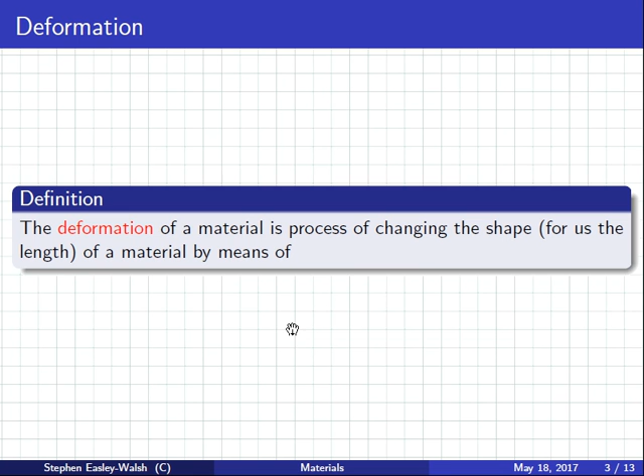Okay. So I actually mentioned this word in the last class, but exactly what do I mean? So when we say the deformation of a material, what we mean exactly is the process of changing the shape, or for us, which is the length of the material, by applying a force, which we call a stressing force. So deformation means changing the shape by using a force. That's all deformation is. So if I deform something, it means I change its shape by applying a force.

So if I deform someone's face, it means I change the shape of their face by applying a force to their face. Yeah? The reason I use that example, Andrew, is because in English you have these things called collocations. You know collocations? Yes. And deform is one that usually goes with face. So if somebody's face has changed shape, you don't say they have a strangely shaped face. You say they have a deformed face. You knew this one, Monica, did you? Yeah. Okay, you have that definition?

Is that your breakfast, Chew? Yes. Healthy breakfast, energy drink and chocolate biscuits. We said he's either in bed or dead. It's one or the other. And if he turns out to be dead, we know who it was. He's already admitted to it. Okay, continue? No. Okay.

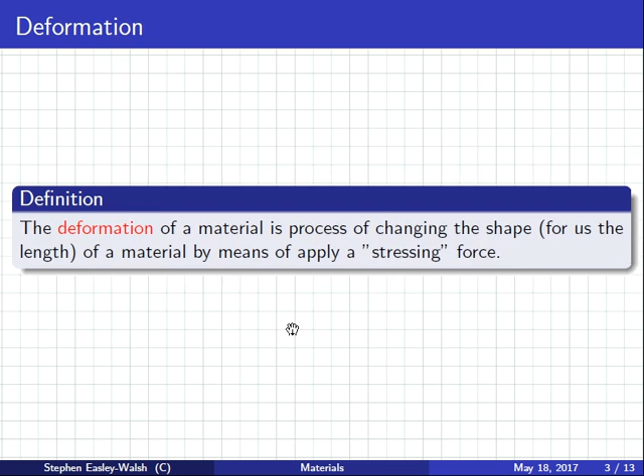Continue? Yeah. Okay, continuing. Next. The word stress actually has a precise physics meaning. When we talk about the stress on a material, well, actually I wonder if anybody knows this already from any physics they might have done. Energy. No, it's not actually an energy term. It's nearly that. It is related to force, but you're not quite right. It's not quite equal to force.

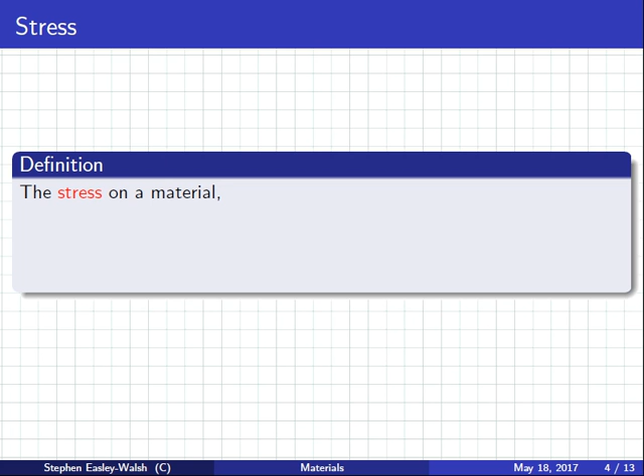The stress on a material is the force per unit area. In other words, it's the force over the area. And importantly, when I say cross-sectional area, what I mean is, if this is my material and I pull it, it's the force divided by this area here. That's called the cross-sectional area. So, what's the unit of stress? Pascal. So it's like a pressure rather than a force. Okay, so this is a new term for people. Mathematically, this formula: stress is force over area.

Be strong, Jerry. Be strong. I try to be strong. The heaters are on, aren't they? The heaters are on. I know. You need to get used to this. It's only going to get colder. This is your life now. Adapt. But I heard that it's not really like this weather all over the place. Correct. It's going to get colder. I'm sorry, it's going to be like this until March. It's 2. Yeah, and it goes minus. I hope so. Why? Because it is my imagination. Well, you won't have that problem here. And we want snow. You won't get snow because we're too near to the ocean. You'll have to move west for snow. So you'll be cold and no snow, and it'll be dark, and you'll be preparing for a test, and you'll be hungry and cold. It's so dumb. I want to go back. No, be strong. This will toughen you up.

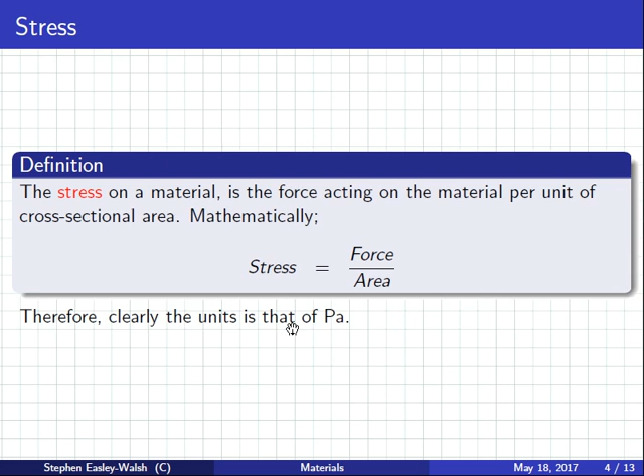Okay. Therefore, the units are clearly pascals, so it's like a pressure term. Now, strain is our second term. Strain has a definition as well. Does anybody know strain? Jockey. Joint. Go on, Sean. You might know it actually. I know, it looked like you knew it. Yeah. Absolutely. Just looked like, okay.

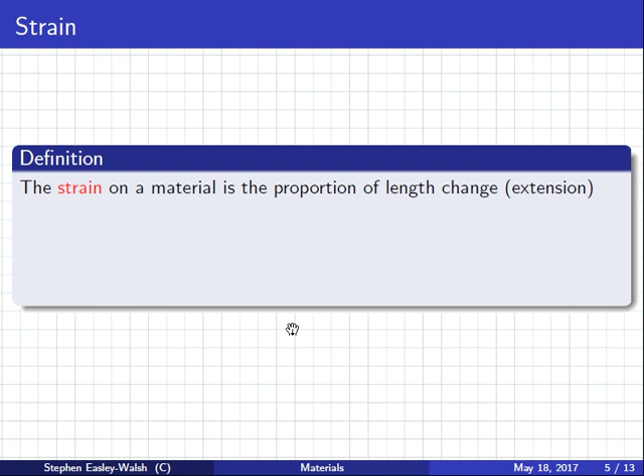The strain on the material is the change in the length, which is the extension, over the original length. Basically, the strain is X over L. It's how much you extended divided by the natural length. So a strain of 0.1 means a 10% increase in the length. A strain of 0.2 means a 20% increase in the length. Yeah? What's the unit for strain? No unit. No unit for strain. Yeah?

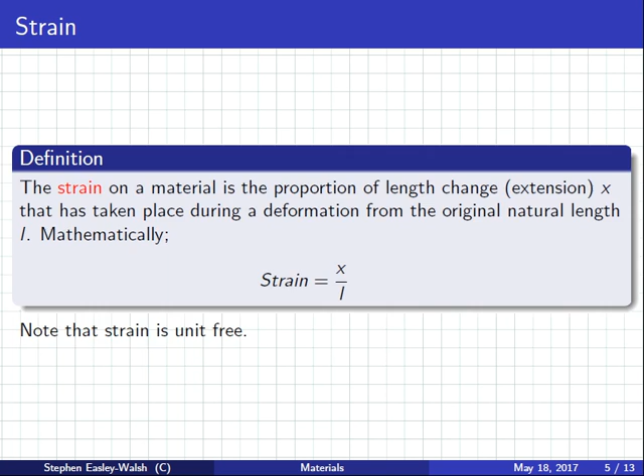Ready? Yes? Okay. So now that we have stress and strain, we have this new constant called Young's modulus. I wrote the letter Y, but really I should have used the letter E. I don't like using the letter E, but that's what they used in the book, so maybe I should change this to the letter E. I just don't like using E because I'm using that for energy already, but that's what they use in the book, so I think I should change that. Anyways, Y or E, whatever you use. Young's modulus, no, I'll change it. E. I'll change it later.

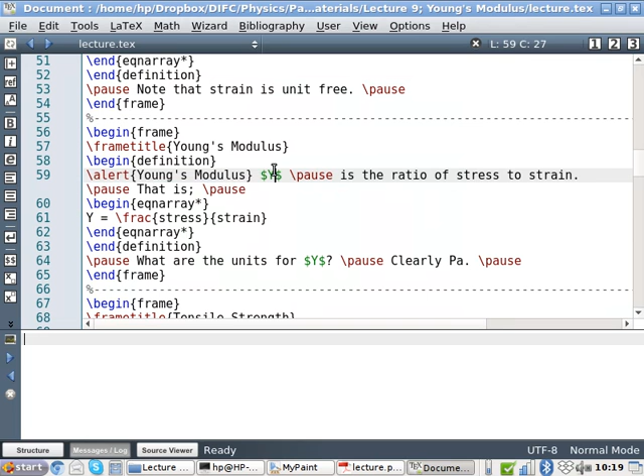It's the ratio of stress to strain. In other words, it's stress over strain. Okay. What's the units for Young's modulus? Well, what was the units for stress? Newton. Pascals. And what was the units for strain? No units. So what's the units for Young's modulus? Pascals. Clearly Pascals. Clearly.

Yeah. So, stress was force over area. So is stress constant? No, because you can change the force. Okay, the area you don't change, but you can change the force. Strain is extension over length. Is this a constant? No, because you can change the extension. The length is constant, but you can change the extension. But what Young noticed was that if you take the stress and divide it by the strain, that is a constant, and that is a different value for each material.

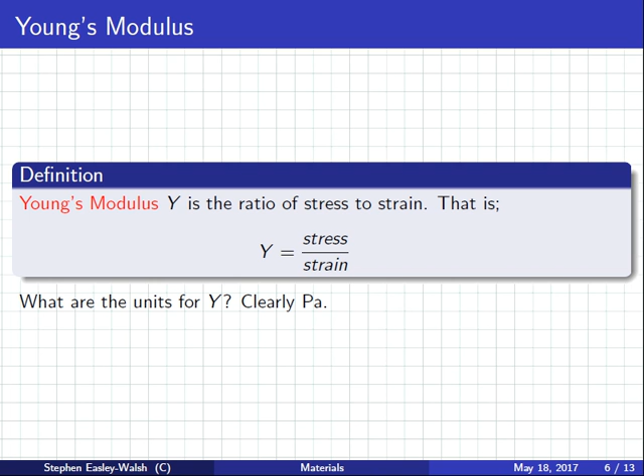Now, we'll come back to exactly the use and importance of this in a moment, but we'll need some more terms. Next term is something called tensile strength. Does anybody know what tensile strength is?

Go on, Sean. You can do it. Come on, Sean. We believe in you. Somebody. It's to describe a material. Maybe it's a... Come on, Sean, tell me! I'm dying here! Try again and feel better. I don't know how to. No, just try, Sean, just try. Don't worry about your English, just try. Okay. Describe a material. How can it... in the lab? Yes? Finished or more? Okay, I'm not sure if I understand, but let me tell you what it is, and you tell me if you understand.

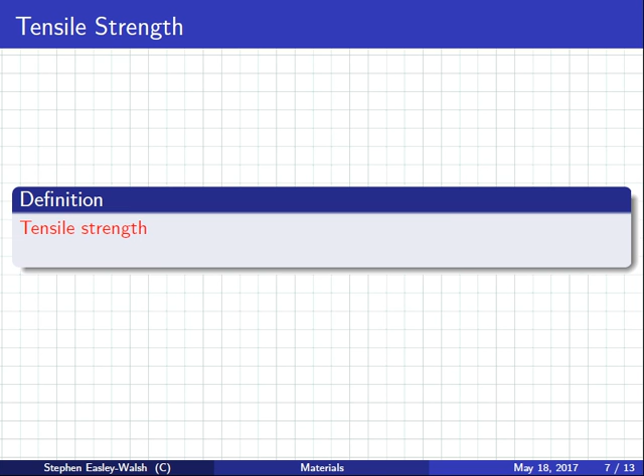Tensile strength is the force you need to pull something like a rope or a wire or a spring or whatever to the point where it breaks. In other words, it's the force you need to break something. Yeah? Breaking force, if you will. Of course, this is very important in engineering. When you're building a bridge, a building, a home, you need to know the tensile strength of the materials used. You don't want to build something that will break. So tensile strength is how much force you need to break a material.

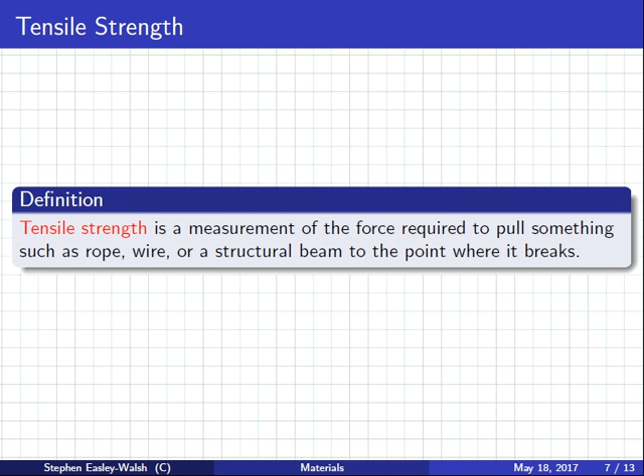I was watching a show a long time ago. I don't know if you've left Dublin, but when you travel outside Dublin, you'll see a lot of old stone bridges. You know, small little hump bridges. Not so big, maybe 10 meters, maybe less. And they're made out of stone. And nobody really knows what the tensile strength is of these bridges. So you have ground, river, ground, and this stone bridge that's built here, and it would be very old. And the problem is, the engineers are worried.

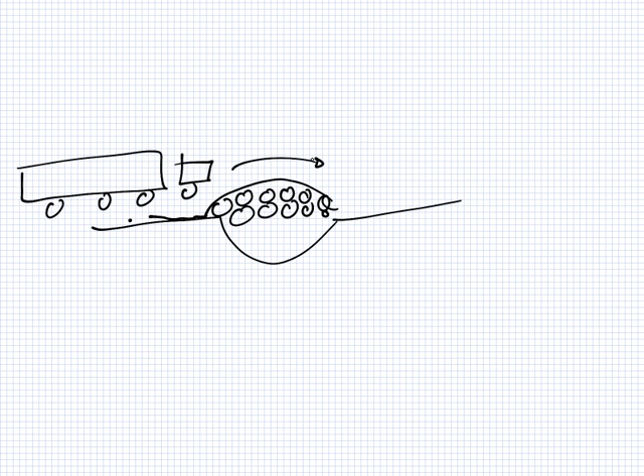Well, these bridges weren't made for big trucks to go over them. So they wanted an experiment to see how strong these bridges are. What is the tensile strength of these stone bridges? So they got permission to destroy one of these old bridges. They were allowed to put these giant poles in the bridge, and these big machines just push a huge force down into the bridge, and they wanted to keep pushing until the bridge breaks, and then they'd find the tensile strength.

And to their surprise, they could not make the machine powerful enough to actually break the bridge. So they don't know what the tensile strength is because they failed to produce a force strong enough. So those stone bridges that you see are shockingly strong. The tensile strength is huge. You're much safer on one of those than on a steel bridge, because we know what the steel bridge tensile strength is, and steel bridges do collapse and fail, but not the old Irish stone bridges. They're quite reliable. Okay, so stone has a very high tensile strength. So stone is a better bridge material than steel would be. So this is tensile strength, and this is real life. This is engineering.

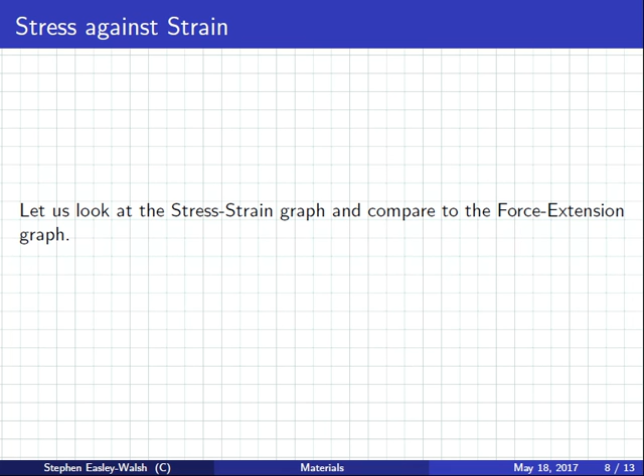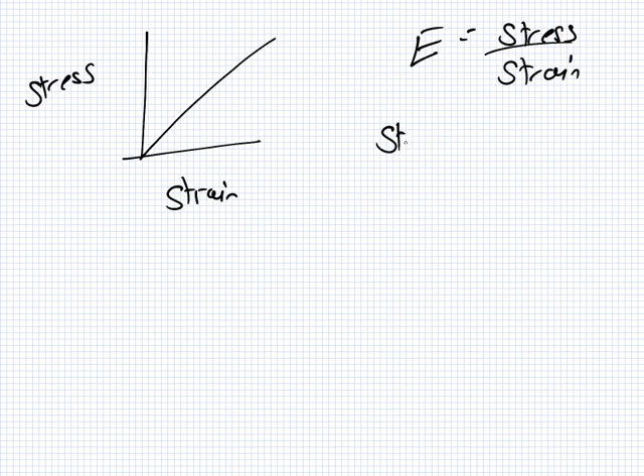Okay. Let's look at a graph of stress and strain and compare it to force and extension. So let's have a look at what a graph of stress and strain looks like. Here we'll put stress, and here we'll put strain, and we'll make a graph. Now, Young's modulus is stress over strain. So that would mean stress equals Young's modulus multiplied by strain. This is on the y, and this is on the x.

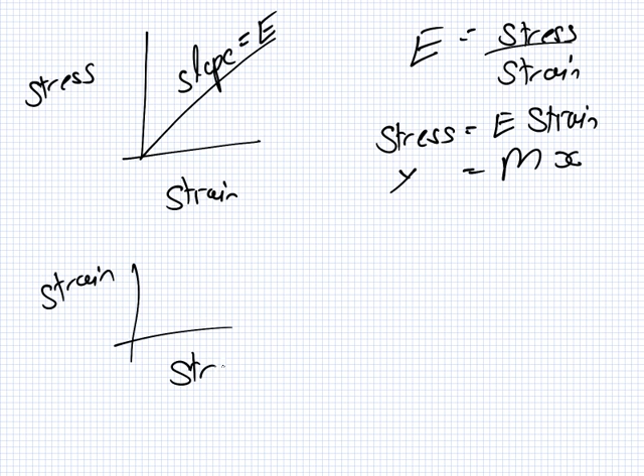So, what is the slope of this graph? Yeah, Young's modulus, if we draw the graph like this. And if we did the graph the other way, strain and stress, what would the slope be? It would be 1 over E. But anyways, back to this graph. What is the relationship between this and the K that we did in the last lesson? Well, let's have a look.

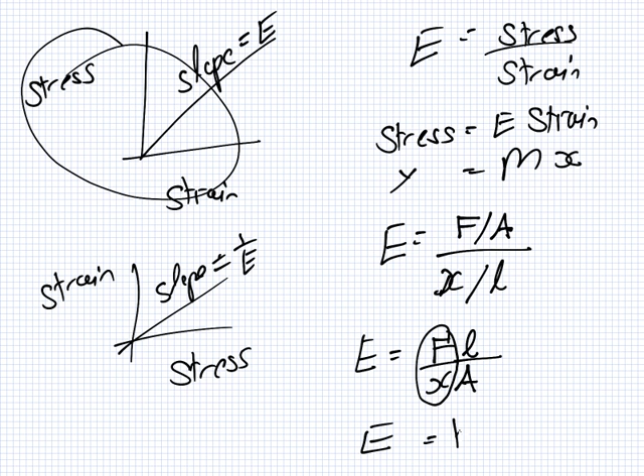E equals stress, which is that, over strain, which is that. And that's equal to F over X. Now, that's an A. It's like having an A here and an L here. But we know what F over X is. It's K. So E equals K L over A. So in other words, we kind of see a relationship between Young's modulus and the spring constant K. In fact, the relationship is linear.

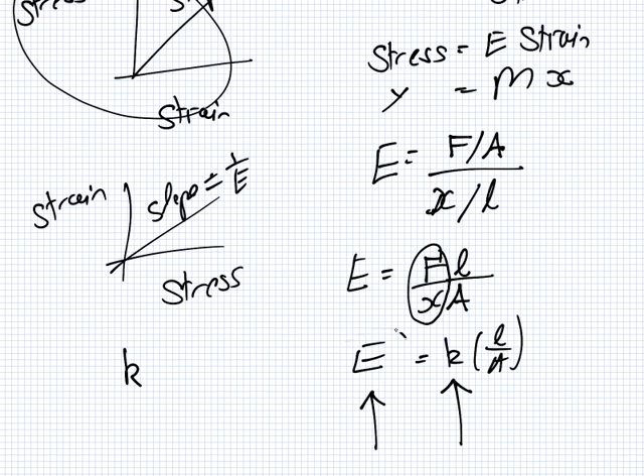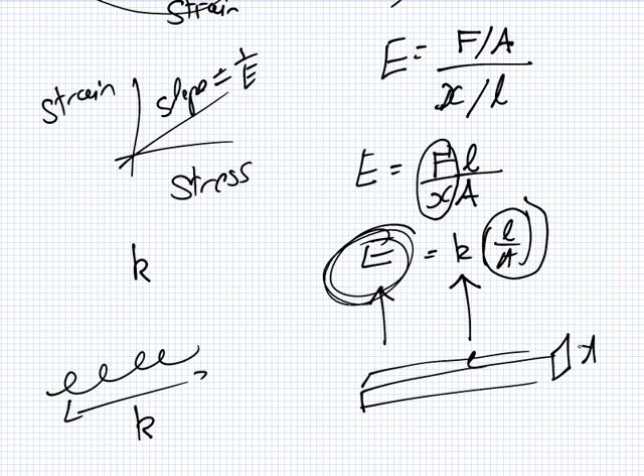By saying the K is bigger, we're also saying that the Young's modulus is bigger. And by saying the K is smaller, we're also saying Young's modulus is smaller. The only difference is Young's modulus also depends on the shape. For the spring, we don't care about the shape for the K. But for Young's modulus, we care about the length and the area. So basically Young's modulus is like K, except we need to care about the shape as well. Okay, so that's the relationship between them.

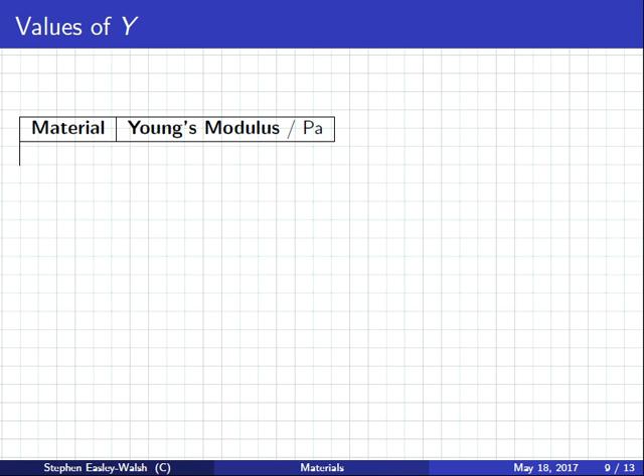Now on to values for Young's modulus. Oh, thank you. Okay. So let's have a look at different values of Young's modulus for different materials. Of course, you'll need these values for the questions. The first material we'll look at is rubber. Rubber has quite a small K, because rubber is very stretchy. So it has a small K, and so it has a small Young's modulus. But small is quite a big number here, because it's still 10 to the 9. So this is what I mean by a small Young's modulus.

Let's look at something a little stiffer. So after rubber, we'll go on to nylon. Now, it's still small, but it's much larger than rubber.

For those of you who don't know what nylon is, Chrissy or Monica will tell you. You know what nylon is? Nylon. It's the what? Nylon. Wow, great. I would never have thought of that. That is true, the nylon bags in the supermarket. That was not what I was thinking of. Well, I was thinking of clothes. Yeah, the tights. Nylon clothes. It's the stretchy material. In Korean it's nylon also, and in Chinese it's nylon. It's the same word. Oh, well then I could have asked Chu to explain what it is. Okay, Chu, what's nylon? It's used for the umbrella. For the umbrella? Oh yeah, I guess it might be.

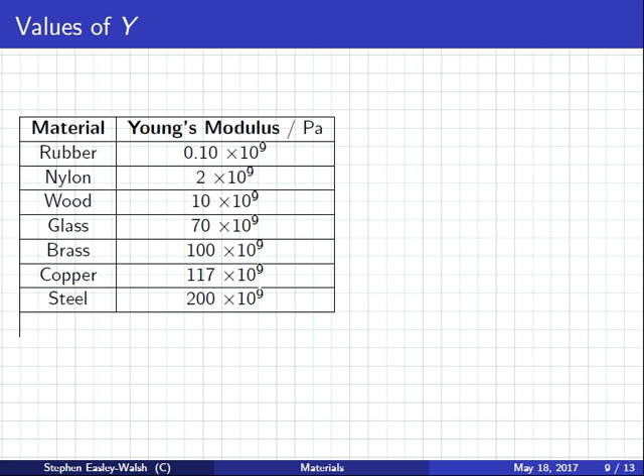Right. Next is steel. Steel, as you can see now, these are all 10 to the 9. You can see this compared to this is quite different as we move up. Next after steel, diamond, no. Graphene. That is what is in your pencil. I know. It's mad, isn't it?

No, this isn't tensile strength now because we don't know what force is required to break it. This is just Young's modulus, which is, as we said, kind of like a K term. It's a measurement of stretchiness. So what I'm saying here is graphene, what's in your pencil, is not a stretchy material. You can't really stretch it easily, like steel. So this is like a stretchiness? It's like a K.

Now, Monica, it is possible. You know, it is actually interesting, but I don't think there really is a relationship between Young's modulus and the tensile strength. So just because the material is not stretchy doesn't mean that it has a high tensile strength. For example, both these materials are quite difficult to stretch, but I feel that the tensile strength here is actually bigger than here, because I feel like graphene is easily broken.

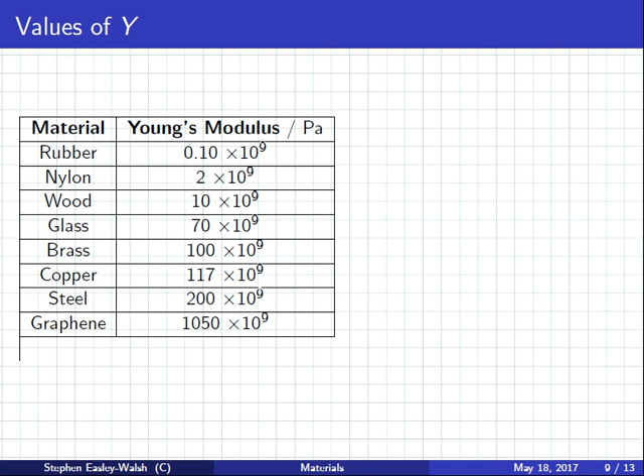So if you throw it, you will break it, because the force applied is quick. But if you stand on it slowly, it has an ability to take a high force. Anyways, don't need to worry about that. These are the values which you need for Young's modulus. Okay.

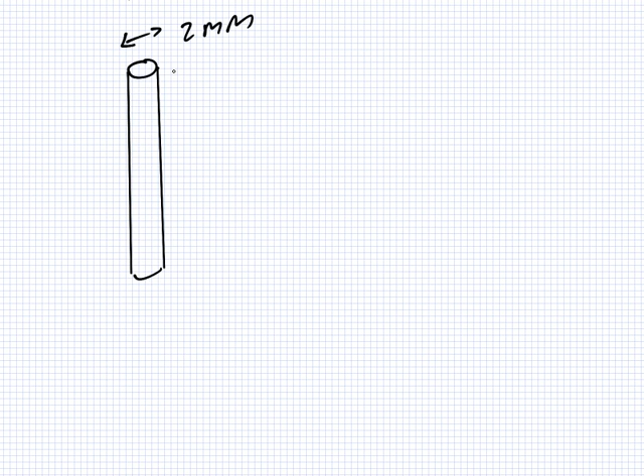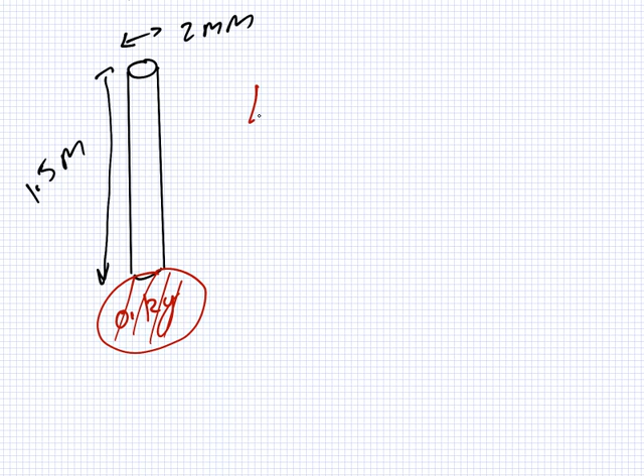Let's have a look at an example. A boy hangs a 100-gram mass at the end of a 1.5 m copper wire, which is attached to the ceiling. The wire is 2 millimeters thick. Okay, let's draw that. We have a wire, hangs from the ceiling. It is 2 millimeters thick, and it's 1.5 meters long, and there is a 0.1 kg mass here hanging from it, and it's made of copper. So what's the Young's modulus for copper, did I say?

Okay. Part A. What is the area? The cross-sectional area. This area here. So what formula do we need for the area here? No, they were right. Pi r squared. What's the r here? 1 millimeter. So that's 10 to the minus 6 pi, which is 3.1415 times 10 to the minus 6 meters squared. Are you okay with that so far? Yeah.

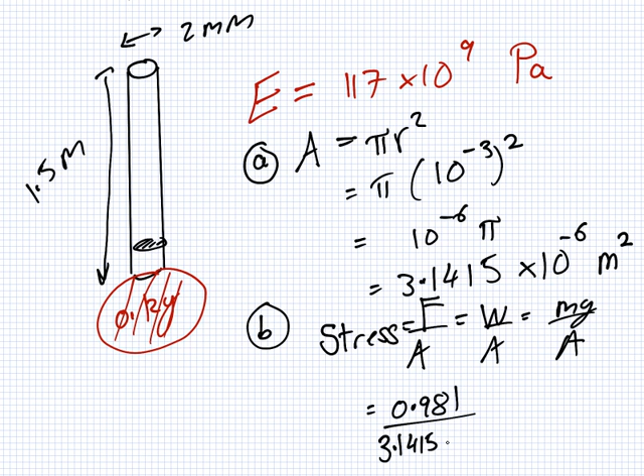B. What is the stress? Okay, what's the formula for stress? Force over area. What is the force in this example? Yeah, the weight. And what's the weight? mg. And what's the m? 0.1 kg. So that's 0.981 over 3.1415 times 10 to the minus 6. So what's the stress here, please?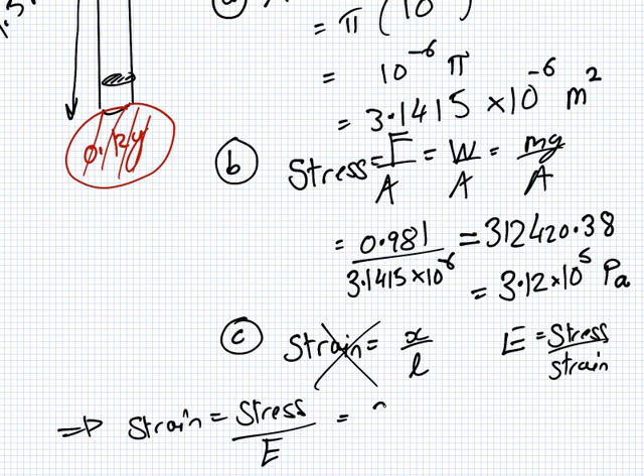C. What is the strain? Okay, what's the formula for strain? X over L. Now, do we know the X? No. But actually, we could use the formula Young's modulus is stress over strain instead. Because the strain equals the stress, which we know, over Young's modulus, which we know. So 3.12 times 10 to the 5 over 117 times 10 to the 9. And what do we get, please? We should get a small number here. Okay.

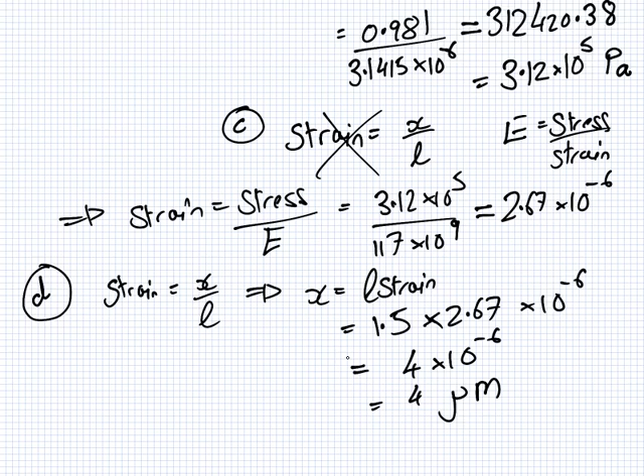D. What do you think I might ask you next? The K. No. The X. Yes. By how much has the wire extended? So we know that strain, which we've worked out, is X over L. So that means X equals L multiplied by strain, which equals 1.5 multiplied by 2.67 times 10 to the minus 6. What do we get? 4 times 10 to the power negative 6. So that's equal to 4 micrometers. Okay, so far?

And finally, what is the K? So we know in the picture there's two forces, an F and a weight. So we know that Kx equals mg. So K equals m, which we know, and the g, which we know, over the x, which we've just worked out. What was my m? I forget. 0.1. Yeah, so that's 0.981 over 4 times 10 to the minus 6. So that would be a pretty small number for copper. Sorry, big number.

What do we get? 245,250 newtons per meter. Yeah, it is. Now that formula is not in the formula book and you're not expected to know or use it. So we can use it if you know it. Yeah. Okay. Continue? Yes?

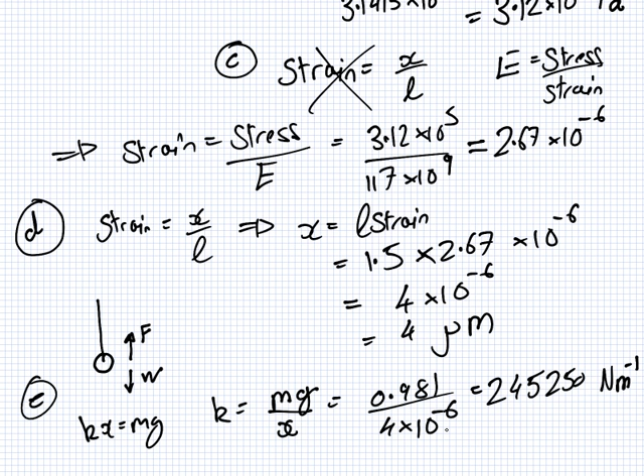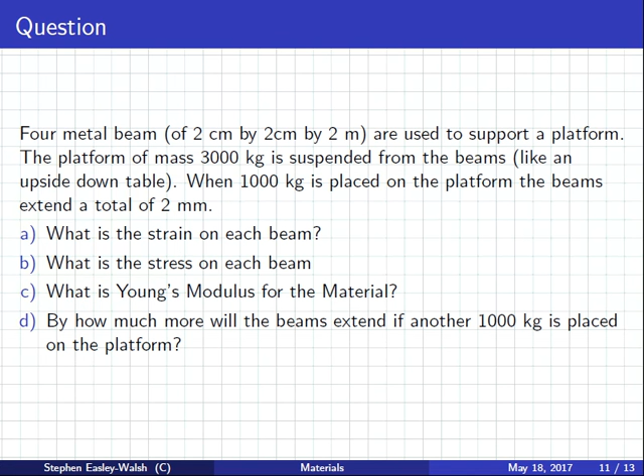Right. Next one. This one isn't really that good. It's kind of stupid. Now, I like this first example because it's a good example of all the different things they can ask you to do. In the exam, I find that Young's modulus is usually a nice question. It was difficult for me to think of difficult questions, but I did my best anyway. So can you try these questions for 5 minutes, please? And then we'll finish. It's on the next page. You'll need to use the table of values you got.